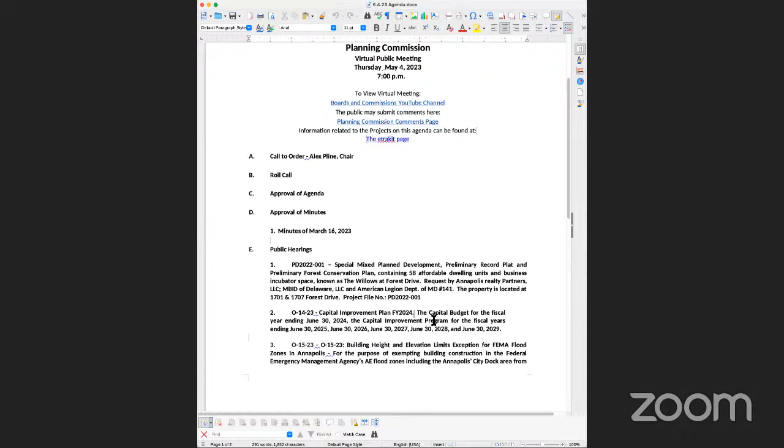The capital improvement plan, yeah. Okay, putting both those in one meeting is big, but my sense was we were going to need this meeting and the next meeting to finish both the Willows and the capital improvement plan. So that was my suggestion to move it to the June 1st meeting. Just to be cautious, perhaps we could just postpone it till the next available date. Okay, and then we can move it again if necessary.

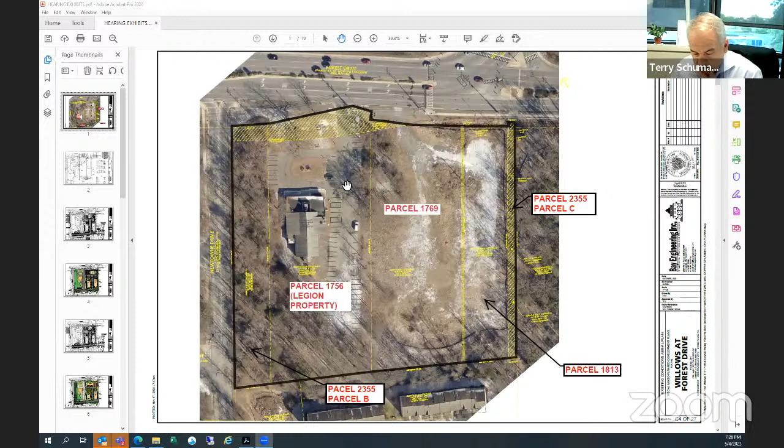All the parcels have been consolidated in the special mixed plan development proposal to promote a mix of land uses with an integrated design and a coordinated plan in accordance with the planned development. The Willows at Forest Drive will be sited on parcels 1769, 1813, and 2355 parcel C.

So that'll be the Willows project. And then the Legion will continue as its existing property. And then reserve parcel B, wooded acreage lot, is going to be added to parcel 1756 at the end of this project.

And then we're going to propose connectivity, landscaping, buffering for the Legion property as part of this project. As I indicated before, parcel B is 0.73 acres. It's to be transferred to the American Legion, which has future plans to restore the currently unmaintained area via Garden of Heroes, which enriches the healing experience of wounded veterans, their families, and caregivers through therapeutic gardens and enhanced green space. Gunny just indicated that before.

The entire property outlined in black here, the heavy black line, is comprised of 5.6 acres. It's split zoned R2, single family residence district, and R3, general residence district.

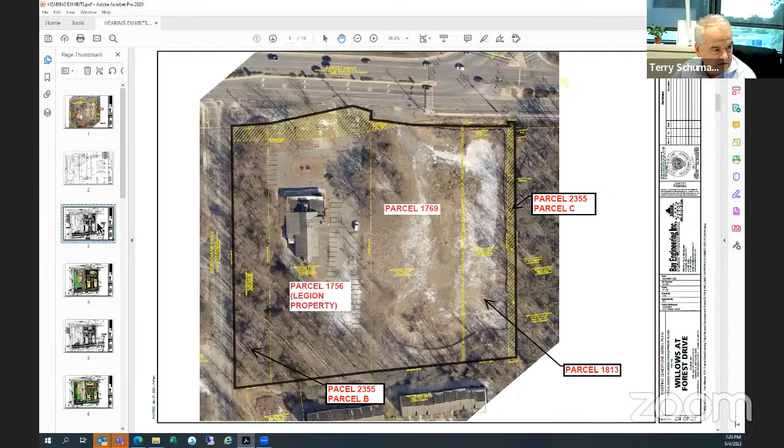I'm going to move on to this plan. So this is an existing site plan, but I just wanted to show, this parcel, which contains this heavy rectangular line, is the R2 zone, and all the other parcels are zoned R3. So it's split zoned R2 and R3.

Special mixed plan developments are allowed as a permitted use subject to standards in each of the applicable zoning districts, pursuant to Annapolis City Code 21.48.010. Also, just wanted to point out this site is not located within the Chesapeake Bay critical area.

And I thought this is a good slide just to show you. So this is the forest stand. Tom talked about it a little bit, but the heavy areas, that's stand A. This is the forested area, stand A, 1.08 acres.

And then stand B was the other stand that Tom was talking about, the other forested area. Everything else on the site is not considered forest.

These circles, the circles with no shading, are all significant trees. Those are trees identified as 24 inches and less than 30 inches. And the heavy shaded circles, those are the specimen trees, which we consider greater than 30 inches.

And just for point of context, what Tom was indicating before, this was ST4, and we'll see it as we move through. This is ST3. So these were the two trees that we were asking for a variance for removal. And stand B was the portion that we were asking for removal on the forest.

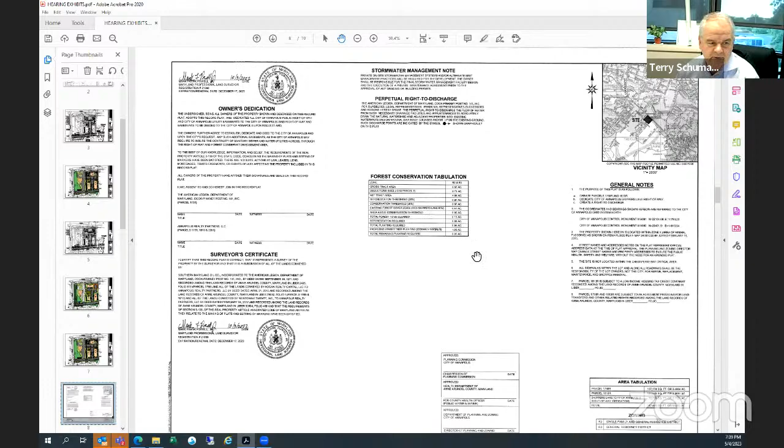And then on the second page, going back to that parcel B wooded lot, we're going to show a forest easement on that lot. This forested area was part of the original Riders Glen subdivision, and that never created the easement. So we will create the easement with this plat.

Again, this is a preliminary plat for tonight, and then we'll go back and make the changes, submit them back through planning and zoning, and it'll ultimately come to you as a final plat for approval. As far as Title 21 goes, the use, bulk, open space, and density standards have all been met for this project.

The Planning Commission can adjust the applicable bulk standards, including a 20% height increase for low-income housing pursuant to Section 42 of the Federal Internal Revenue Tax Code, meeting the criteria of the Federal Low-Income Housing Tax Credit Program. The Willows at Forest Drive complies with these federal codes and programs, and thus we are requesting a 20% height increase from 35 feet to 42 feet. We believe these heights are compatible with the 42-foot tall residential structures located on adjacent properties around this property.

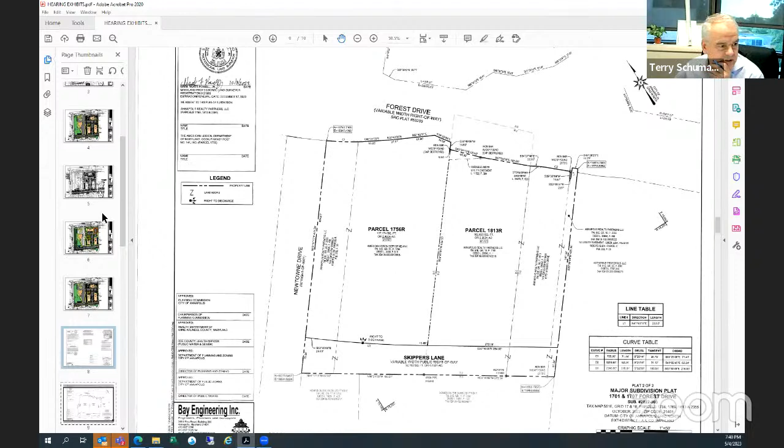As far as parking goes, as indicated before, when we came back in from the work session, we did reduce the parking down, so we submitted an alternative parking request. Multifamily dwellings require a parking ratio of 1.5 parking spaces per unit for a total of 87 spaces to serve 58 dwelling units.

We've provided an alternative parking needs study supporting that request for a reduced parking area. As noted in our report, affordable housing historically has not required full compliance with parking code requirements. The applicant has constructed and managed numerous affordable housing projects throughout the state of Maryland. Based upon their experience and a parking needs study of their facilities, a parking ratio of 1.1 parking spaces per unit is being proposed for a total unit parking of 61 spaces.

So at a 1.1 parking rate for the 58 units, we provide 61 spaces on site. We also have that business incubator in the building, which requires 6 parking spaces, and that's being met as well on site. So we have a total of 67 parking spaces on site. For the Legion property, they require 47 spaces by city code, and they're providing 67. So the parking arrangement between the two will allow for overflow parking if needed.

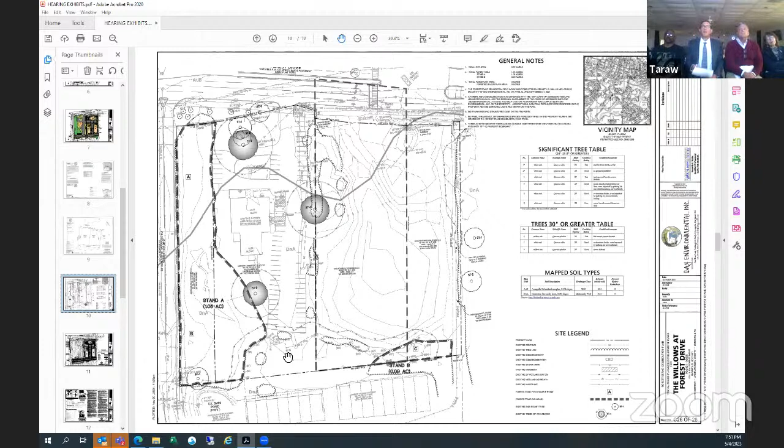I'm sorry, can I interrupt for a sec? Sure. So just a couple of things on the forest conservation plan - specifically with respect to the variance to disturb that stand B that we mentioned about earlier, can you talk a little bit about what if that weren't approved, what hardship would be incurred?

The hardship would be - it wouldn't work. That whole road was aligned with the adjacent property out to Spa Road, so the whole alignment would have to change. It would affect - the road would have to go north, around it and bisect the site. It would impact every property along the way. And do you think this development is even possible if you were to have to reroute Skipper's Lane? I don't think it would be. Okay.

Now, with respect specifically to the factors in the variance request that are in tab 21 of the proposal, most of them deal with what I inferred was the variance to remove ST3 and 4. There are six factors that have to be addressed in that section of the code for the variance, section 171 of the code, but most of them deal with - I think the variance that the staff said was not required. Do you want to walk through those six factors with respect to disturbing stand B versus removing those other two trees?

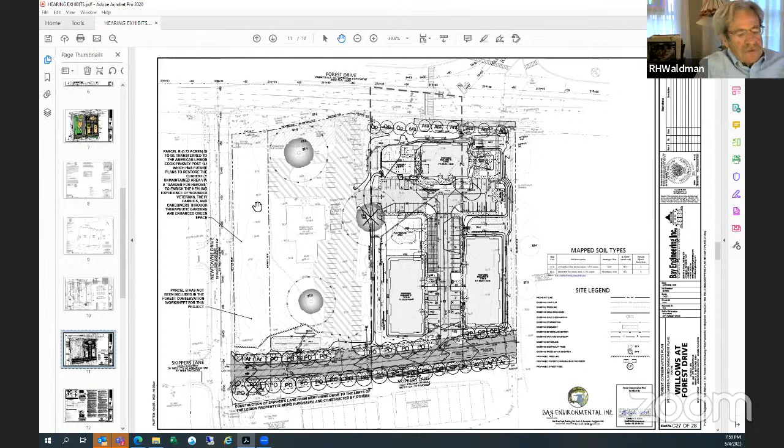Somewhere on one of these maps, you indicate that there are some significant trees right off the property to the east, actually in the village of Providence Point. Yes. Yes, ST1 and ST2, yes. Okay.

They're identified up top here in this table. Okay, I can't read that - so can you tell us how big 1 and 2 are? ST1 is a 25-inch white oak, in fair condition. ST2 is a white oak, 25-inch, in good condition, doesn't appear to have any apparent problems. Okay, a tree with a 25-inch diameter trunk - is that what we're talking about?

Correct. What's the... Mr. Wallace? I'm sorry, Mr. Walls? Wallace, excuse me, thank you. What's the drip line diameter on a 25-inch diameter tree? How far out does the drip line extend? That depends on the tree, how large the canopy is. This is a forest grown tree, so the canopy is going to be smaller than you'd have in an open grown tree. So the exact drip line, it's hard to say - the difference between the drip line and the extent to which the roots extend.

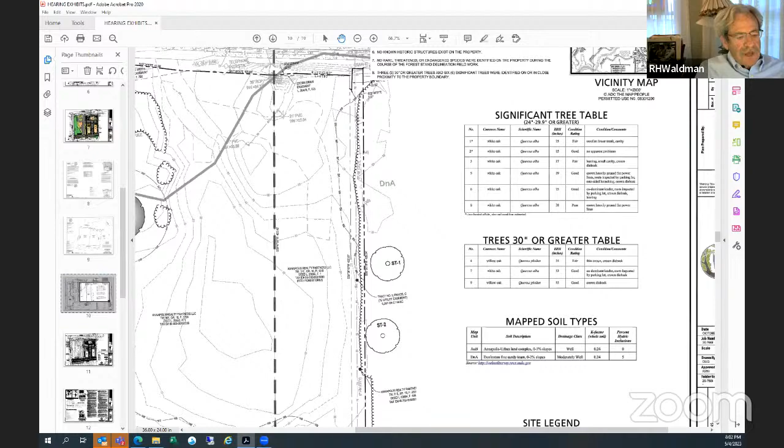Are you able to give us a figure of how close the foundation or limit of disturbance is going to be from building B, sometimes called building 2? You understand there's a big building that goes as close up to the buffer line as it can, and it is directly in front of those two trees. So if we could get some idea of how close that building comes to that tree.

So the closest one is ST2, right? That's at the bottom, yes. From the center to the building is 50 feet. What's the limit of disturbance? There's a force main right here from the city already. Our limit of disturbance is about 20 feet from the building. So that would leave 30 feet from the center to our limit of disturbance, approximately right here where the plantings are. We're about 30 feet.

Mr. Wallace, what if anything should be done to ensure there's not significant damage to the root structure of both of these trees? What kind of construction techniques would be suggested? It's important to note, I'm not sure when that force main went in, but those two trees, 25 inches, have been there a while. So my guess is when they put that force main in, the last 20, 30, 40 years, they severed most of those extending roots toward the property. That doesn't mean some haven't grown back, but my guess is if they open trenched that, they cut all those roots on the west side of both trees.

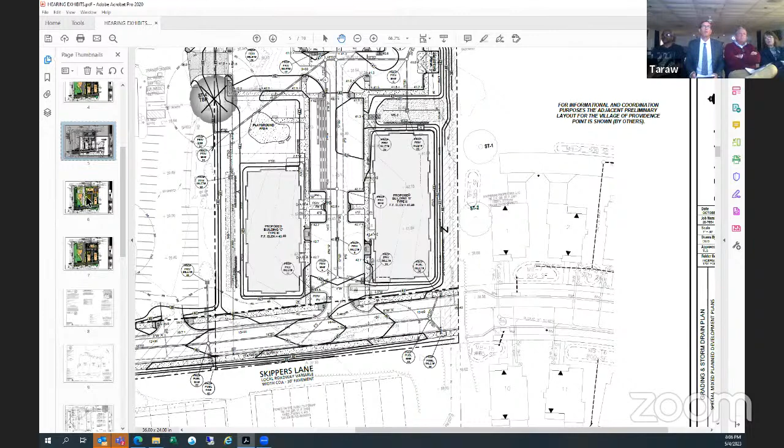Mr. Seaman, can you comment on how much of the overall property is dedicated to the new Skipper's Lane? That's sort of a carve out of the usable, developable part of the property. Of our 3/4 of an acre, 0.75 acres. I think you asked me how much of the acreage is being dedicated for Skipper's Lane? Correct. Yeah, 0.75 acres.

Total, that's from Newtown Drive to the limit of Skipper's Lane. Well, they're gaining all sorts of advantages from being on Skipper's Lane and having access on Skipper's Lane. Yeah, I'm just giving you the square footage, right? Or the acreage.

But part of this layout and everything we've evolved to is partly because we've given up 0.75 acres and everything's pushed this way. We're being pushed this way from Forest Drive. So the Skipper's Lane and the Forest Drive constraints have all come together to explain why we've come up with this development. It helped to develop the site plan.

Mr. Seaman, with respect to this staff report, there were two conditions in there. You mentioned some of the conditions already, but there were two conditions on which the development team felt we could use some relief to make sure this property could go through. One was a request for an additional 20-foot buffer from Forest Drive. Can you just comment on that?

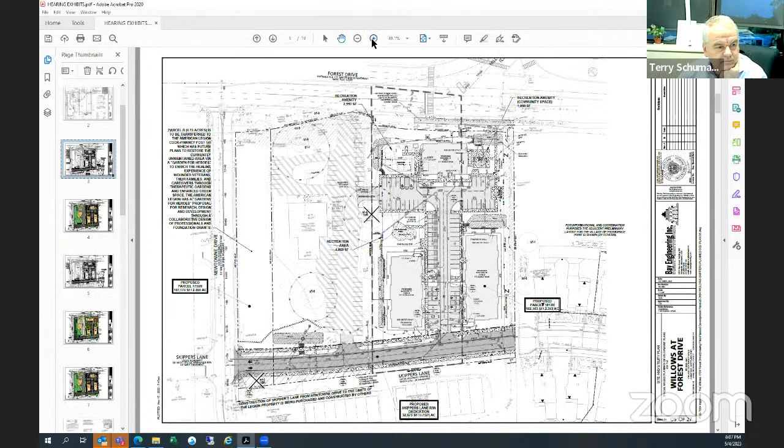Yeah, let me go to the site plan. I think the staff report indicated they would like to increase it — you'll see it in the conditions. Currently, the way we have it proposed, we have a 20-foot, 20.5 foot setback to the property. And if you take the building to the curb line of Forest Drive, it's approximately 50 feet. The condition was they would like us to increase the 20-foot to 40-foot, which would result in a 70-foot buffer from the curb line to the building.

And the hesitation on our part to do that is we've developed this plan with amenity space and gathering areas in the front, and setbacks off of this interior more for community benefit — larger patio areas, gathering areas, garden plots, and playground areas. If we have to shrink it, we'll just be taking away areas meant for the benefit of the community. So we met the 20-foot landscape buffer, and we were hoping we could propose the plan that we showed today.

Can I ask a question about that? With respect to building A, what's different now is that it's smaller, and the incubator stuff is there. So what's all on the lower floors of that building? I'm thinking about the buffer with respect to noise from Forest Drive — I'm assuming that's kind of what staff was getting at, a larger buffer essentially meaning less noise. Do you mind if Judy speaks next about the architecture? She could probably answer that better than I can.

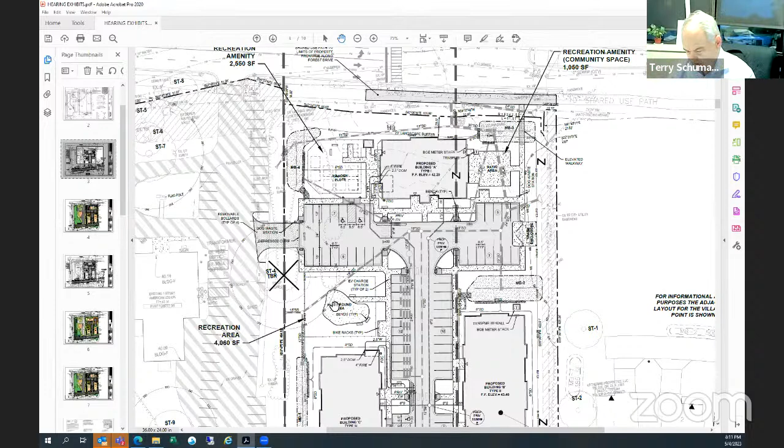Mr. Schuman, there's also a condition related to traffic control out on Forest Drive. Can you just comment on that? Yeah, I think it's condition 5. It recommends that the applicant shall coordinate with Anne Arundel County Department of Public Works for lane configuration and signal phasing modifications at the Forest Drive, South Cherry Grove Road intersection. These improvements shall be approved and bonded prior to the issuance of grading or building permits.

Our understanding is that the traffic APF study didn't require any mitigation — it was just a recommendation in the traffic study. But my understanding is that these improvements are being done by Providence Point. So I just think the condition should be clarified, that these improvements are to be done by Providence Point.

What's the buffer between the two lower buildings and the sidewalk? What kind of distance are you talking about there? Those are 15 feet to the sidewalk.

And 14 feet. We looked at that a long time ago too, trying to provide some sort of streetscape there. I think that was something planning and zoning was pushing for as well. So we think the 14 and 15 foot is adequate to provide some landscaping and buffering in this area, so the buildings aren't right up against the sidewalk.

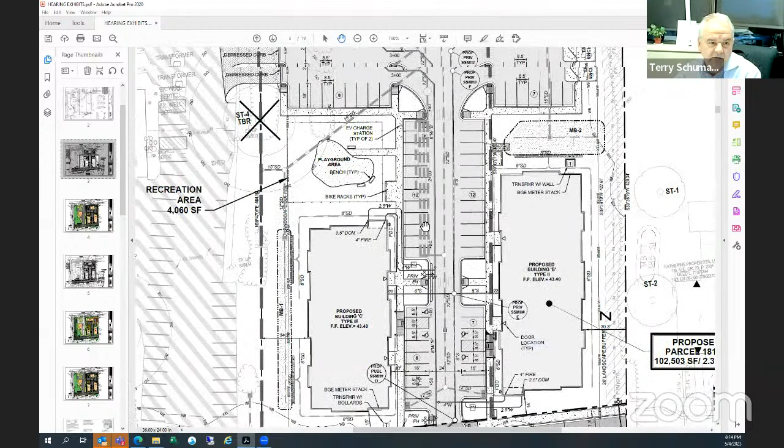You'd lose parking in here, but you would lose. I guess you're right, Mr. Waldman, you could just reduce this and take the whole site and move it down. Well, and lose one at the top. I'm just trying to think it through about what you could do. You're talking feet, less than 10 feet.

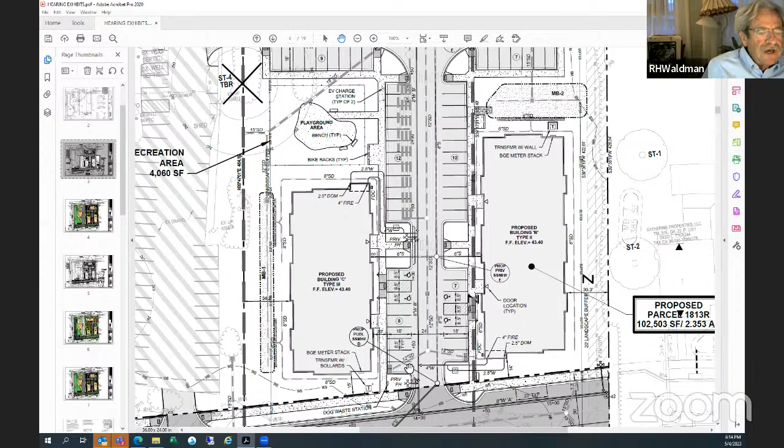So every foot counts, so to speak. Absolutely. So if the whole thing were moved 8.5 feet down, then you would only lose 8.5 feet at the top. Right, yes, okay. I'm just trying to think it through there.

And I think, adding space back here, if you go back to the police, the safety and landscaping and things like that, these are just areas that aren't really useful. But there may be other, once we hear from Mr. Smith, we may hear what his reasons are, and there may be modifications to the plan by way of some fencing or whatever. I'm not quite sure yet what his reasons are, but he'll have a chance to explain those. There may be some compromising available. Agreed, definitely agreed.

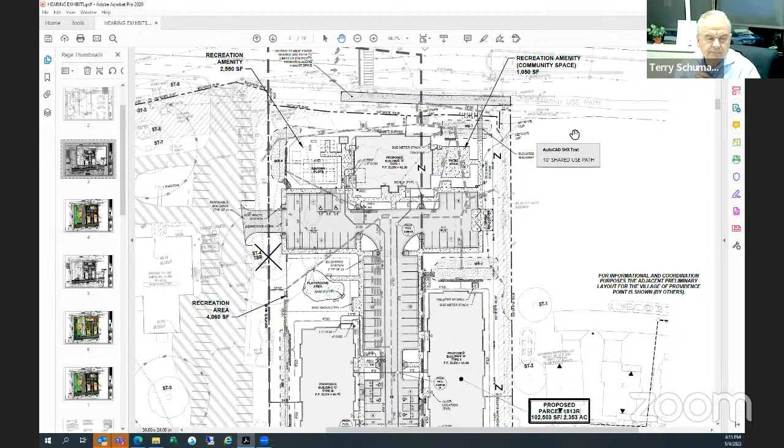Okay, unless there's further questions for Mr. Schuman, I'll have Judy Miller talk about the architecture here.

Hello, remember me from last time, Judy Miller with Architecture by Design. Terry, do you have slides of the architecture? Yes, I do. Give me one second, I'll put that up.

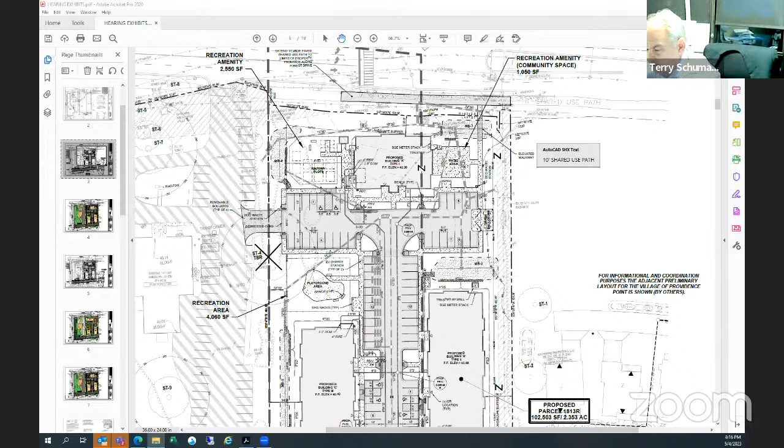Can you put it up on the left so I can see which sheets are going to come up? There we go, thank you. So this is the cover sheet of the latest submission, where it indicates what the architecture looks like. It's been adjusted based on feedback from your group from previous meetings. As you can see, it's 3 stories, not anything that is obtrusive. It has nice roofs, nice porches, some cottage style windows, gables, and a mix of brick and siding and shingle siding.

I'm trying to think, do you have the renderings in this, the other renderings we did, Terry? Yes. You talking about the sketches you did? No, not the sketches, I think we had some other colored renderings. Give me a second.

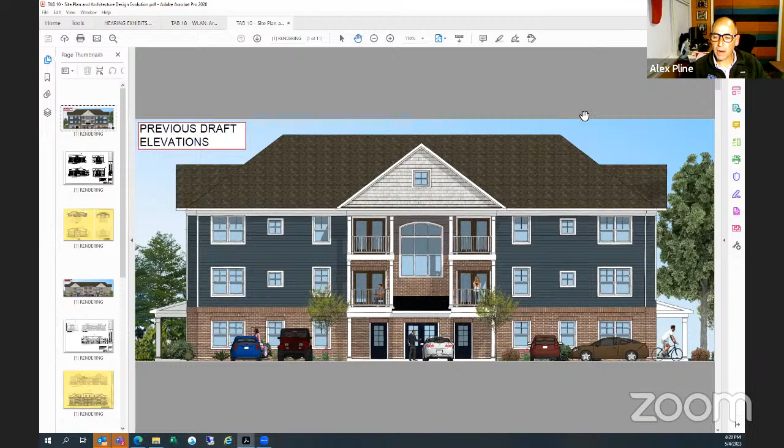How about for building A? So it's just thinking more about the setback. Okay, Terry, can you go back? Yes, thank you for that one. So go to building A, floor plan up there.

Okay, so first floor plan, there are 2 three-bedrooms on the first floor, and the rest is all the incubator space. And your residences face forest and your incubator faces inward? Yes, it does.

Why wouldn't you want to put your residences towards the quieter side? Well, we like to keep eyes on the street with the offices. That's where the leasing office is, and they can kind of keep an eye on the community.

And what's interesting about this building, what we did to get a continuous space across the first floor, those 2 first floor units that face the backside of the building have their own private entrances. They have a nice little porch that continues across there that brings them from the parking back there, and it's fully covered. Terry, you are wonderful, I'm going to have you as my Vanna every time.

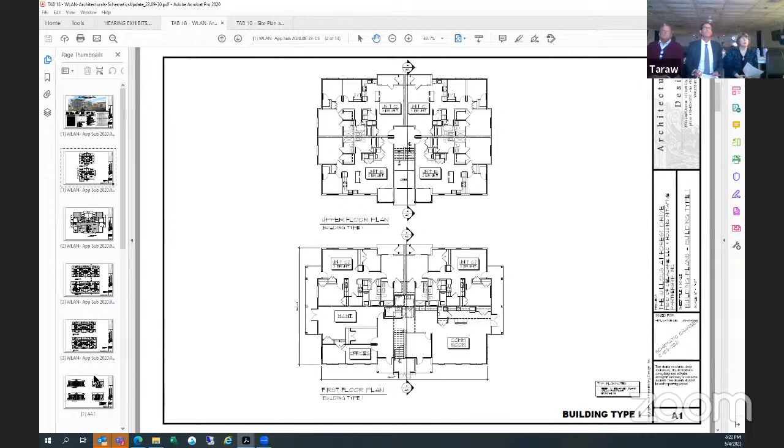And can we see the layout of one of the other 2 buildings, not building A? Go down to, yep, that one. Up, yep, that one. Okay, so this is type 3, and this is an old one before we coordinated between the site plan and the architecture, which was A, B, and C, and 1, 2, and 3.

So this is also known as building C, and you can see that it's basically 2 pods of gardens that are linked together at the center. There are 4 units per stairwell and 3 stories. So for a total of 2, 4, 3, let me see, that's 12, 24 units, correct? Yes, in that building. And this is all 1s and 2s.

A question about the ADU units. Are they in a specific building or just throughout? Some of them might be in different buildings, all affordable. Did I say accessible? ADA? I meant the ADA, accessible. Sorry, oh, I'm sorry, I thought you said ADUs and I don't know that answer.

So if you look at this plan, matter of fact, this one has a UFAS unit right in the front. Yep, right there, you go. Okay, I see it now. Thank you. So that is your UFAS unit, that's your higher level of accessibility. All of the ground level units meet fair housing, which has a higher level of accessibility than your average housing.

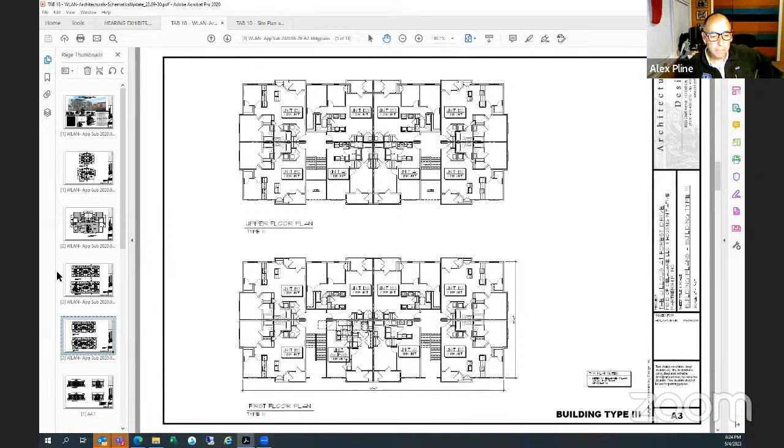Anything else? I don't think so. Is there any additional comment? No. Does the commission have any other questions on the architecture? Anybody? Not for me. Well, that concludes our presentation.

I believe Mr. Smith had some comments on the conditions. Mr. Chairman, may I continue? Yeah, go ahead. Certainly, Terry, thanks for leaving the site plan up.

So the staff has recommended, beginning on page 16, there are 35 conditions, most of which the commission has seen before. There are a number of standard, boilerplate conditions, but there are a few that are specific to just the Willows project. And since we've been talking about building A quite a bit here, we've actually talked about the location and position of building A for almost 2 years since the onset of this project, and the location consistency with other buildings on Forest Drive and their setbacks.

If you look at the Village Greens of Annapolis, it has 2 commercial, 1-story structures set approximately 65 and 70 feet back from Forest Drive curb line. The commercial building across the street is a 2-story building set approximately 70 feet back from the curb line. So in trying to be consistent with structure locations on Forest Drive, but also because this is a residential structure of 3 stories, to give residents relief from the noise of Forest Drive, we want to push this building further back. Staff believes this can be achieved not by removing parking spaces, but by relocating parking spaces.

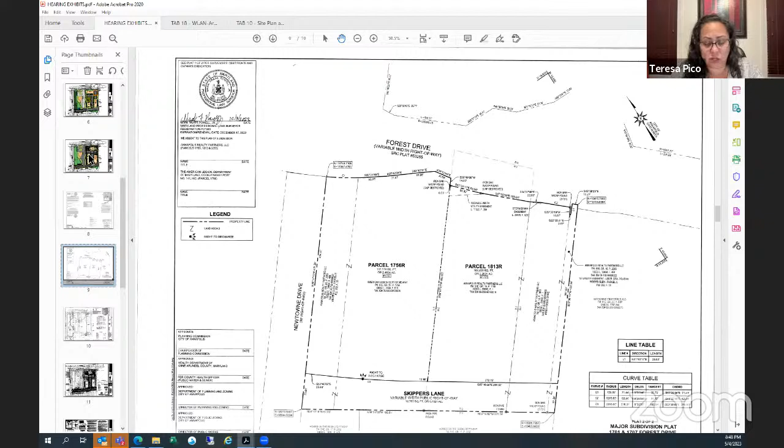Understood, thank you. And then as far as emergency access, I noted somewhere that emergency access was expected to be utilizing that space through the American Legion property. Did I read that wrong? Is emergency access available on Skipper's Lane as well, or is it only through the American Legion pathway through the bollards?

No, emergency access for American Legion is going to be off of Skipper's Lane, off of Forest Drive, and between the two sites. I mean, you remove the bollards, so they'll have full emergency access.

Didn't I see something in the application package that looked like turning radii for the T of the parking lot? I assume that was for a fire truck entering off Skipper's Lane. Is that correct, did I read that right?

That's correct. We designed this T so a fire truck could come in, back up, and then leave. But if the fire truck needed to pull the bollards and get out this way, he'd be able to do that. Having the bollards there, in an emergency without time to go out and unlock them, you still have access to the site with the fire truck.

Through Skipper's Lane. If the bollards stay in place, we still have adequate access, and the fire department scrutinized and looked at that through their review. Yes. So their acceptance of this design was not predicated on having to remove the bollards. That's correct, that's why we did that turning template that showed they could come in, back up, and leave.

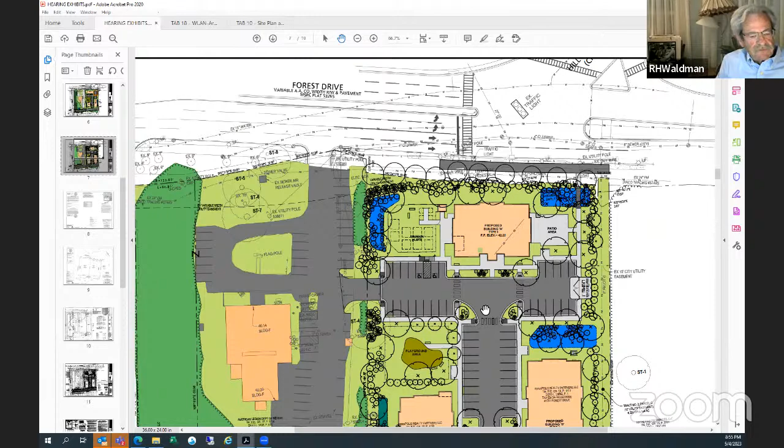Put it on the other side, it flows to the community building. So put the patio area on the other side and have the community space on that side also, and move the whole building to the right, and you end up with much more integrated space to the left. Anyway, you've got 2 weeks to think about it.

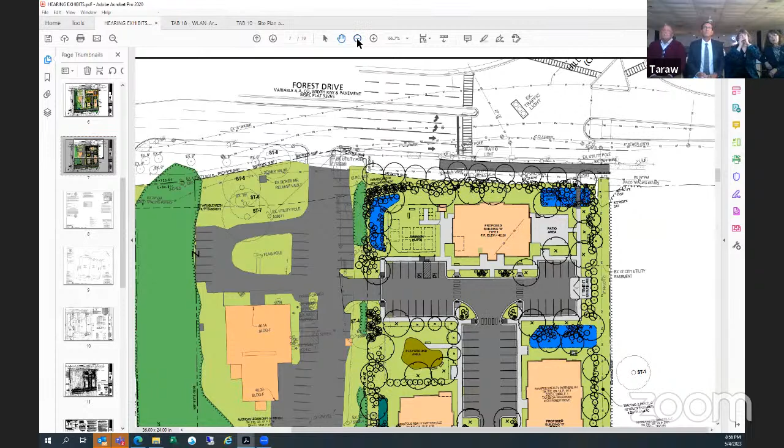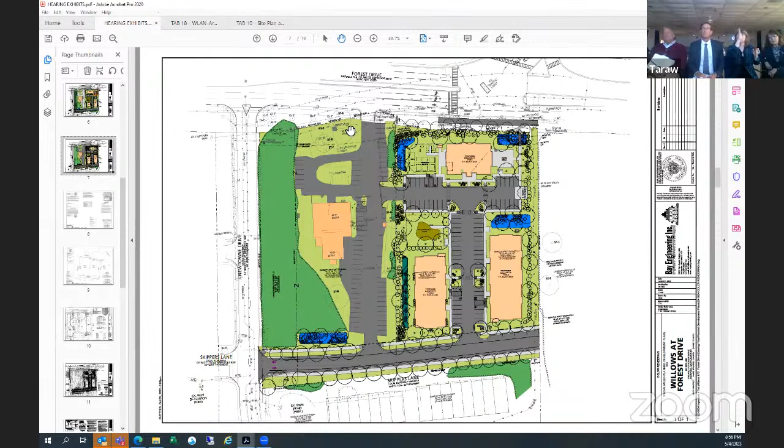Can I interject one thing? Because at the work session, we did talk very much about, can you zoom out a little bit, Terry, wanting Skipper's Lane and the architecture to address that so it felt more welcoming, not pushed so far back away from Skipper's Lane. So we pushed that down. It was very important to align the axis of the drive coming in between those buildings with the axis of the building up above, so you have a focal point, which happens to be the entry of your property. That is very important to be in focus with that drive.

Yeah, but you're looking down a whole lane of parked cars. That's what, 150? But it's not. I disagree with you. I'm not going to debate with you.

I thought you wanted to discuss it. Sorry. I mean, I think that you made a good point. I think what we would refer to that as the terminating vista. That's maybe a little bit hyperbole in this case, but I think that's a good point.

One last question: the width of the sidewalks on the south and the width of the lanes on Skipper's Lane, are they congruent with the expected width from the adjacent development on the east? Yes, you have two 10-foot drive aisles, one in each direction, then 2 5-foot bike lanes, and then 6-foot sidewalks.

Separated by how much green space between the bike lane and the sidewalk? I think it's like 6 feet. That's substantial, that's a nicety of this drawing right there. It is. But I'd like to point out, that's on the north side. On the south side, we were putting the sidewalk up against, there's quite a drop off in grade here. Yeah, you're reading my mind, Terry. Keep going. So we pushed the sidewalk in this area up against the curb on this side, but we have the green in between the sidewalk over here. Otherwise, we'd be looking at a retaining wall.

That's the last thing I want, Terry. Appreciate it, thank you very much. It's coming.

Mr. Schuman, you're quite a director tonight. Yeah, thank you, you've been great. Thank you, and please zoom in on it - I've got a small screen here.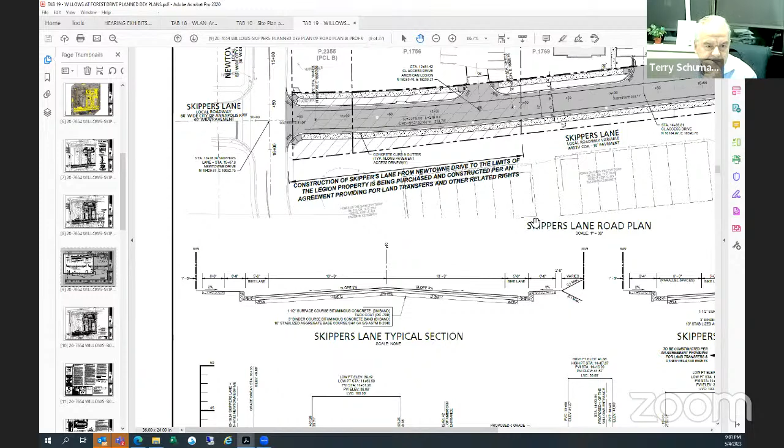Would you be changing the alignment of Skipper's Lane terribly if you flipped what's on the north side to the south side? In other words, you put the green median between a sidewalk and a street on the south side, and had a sidewalk tight to the curb on the north side.

What would that do to the alignment of Skipper's Lane? It would really affect the neighbor, Providence Point. I don't think that works - if you look at the right-hand side of this drawing, it would disjoint it. And I think there are some things in Providence Point up in that corner we'd have to go back and look at.

All right, it's a thought raised by Mr. Sale. Again, people should be driving 20 to 25 miles an hour, so it's not like Forest Drive. That's what you think, we hope.

Well, that's a discussion for another day, but traffic calming is always welcome eventually if you need it. But that's not germane to this discussion right now anyway.

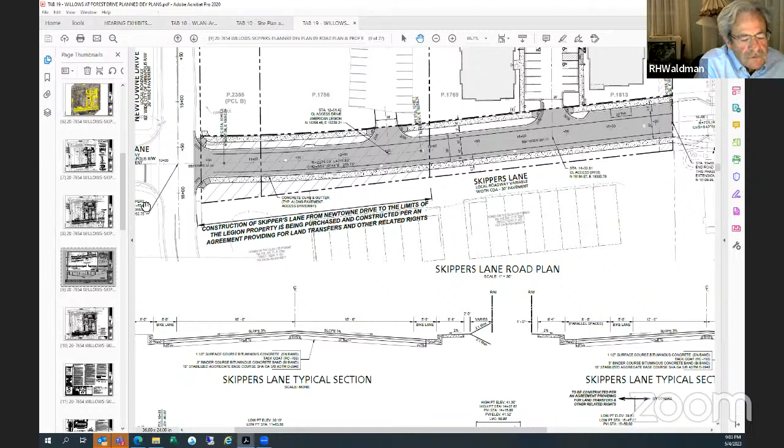I have one final question, then I'll let everybody go. This is based on what Ms. Pico was asking, Mr. Smith - when the Department of Parks calculates the distance from a development to a recreational facility, do they calculate the actual distance a person needs to travel, going to a street, making a left, walking 2 blocks, making a right, and so on? Or do they calculate it simply as a straight line, as the crow flies?

Disregarding what people actually have to encounter in order to get to the park. Understood, Commissioner Waldman. I believe it is delineated as a radius drawn around the subject property, regardless of what route one has to walk, drive, or cycle to get to that amenity. It is within a half mile.

The only policy we've added is that if the recreational facility was across water, such as across the creek, we did not allow that to count, as in the case of the Eastport Shopping Center. There were recreational facilities on the other side of Back Creek within a half mile, and Recreation, Parks, and Planning and Zoning said those should not count. But it is a radius around the project.

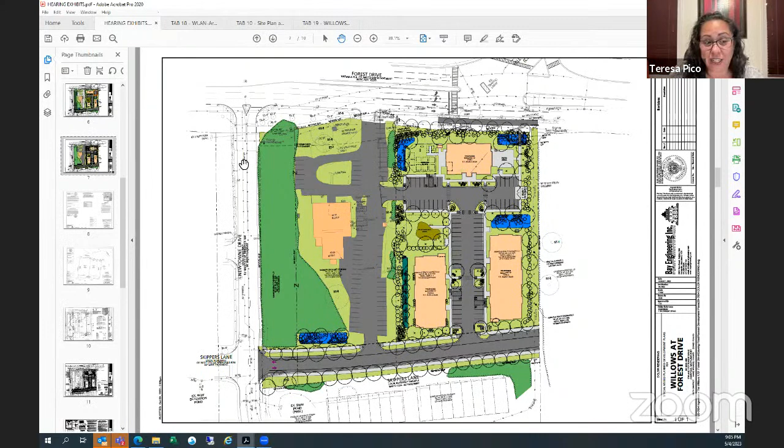Well, this is why I brought this up. I'm sorry to interrupt, but it's actually over a half mile. I know we're getting close, but it was 0.6 from the edge of the closest corner of that property, and the reason I walked it, it's 0.6. So I'm asking, is it truly a half mile from the middle of the parcel, or is it from the edge of the parcel? Where was that calculated? I would have to defer to Recreation and Parks, and I can provide a definitive answer in two weeks.

Thank you. Anybody else have questions? Hearing no other questions, at this point I will declare the public hearing open. Since we don't have anybody signed up, I think this will remain open until our next meeting. So at the beginning of our next meeting, if anybody signs up, we'll hear any testimony people might have and go from there.

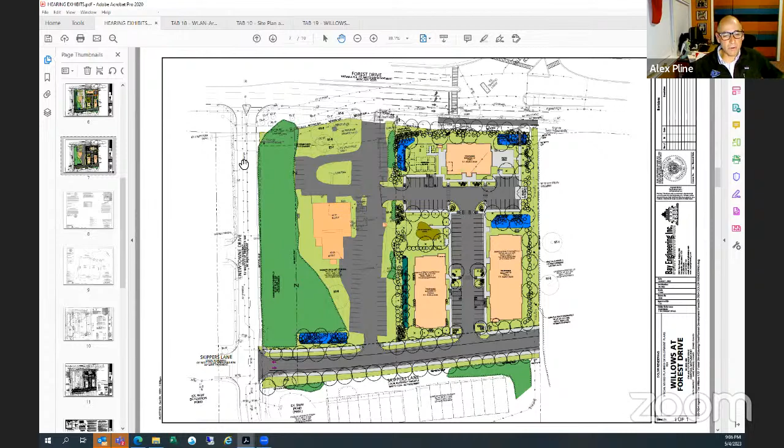Okay, so at this point I think we're ready to move on, but first, thank you all for your work and presentation here. It's good to finally get this in front of us. We look forward to having anybody from the public come talk to us next week or in two weeks if they wish to do so. So thanks again, and thanks to staff.

So at this point, let's move on to our next item, a review of the budget for the CIP. I guess Mr. Jarrell's going to lead that. Yes, thank you, and good evening, everyone. Good discussion of the Willows. I appreciate that. So yes, I'm going to present the CIP.

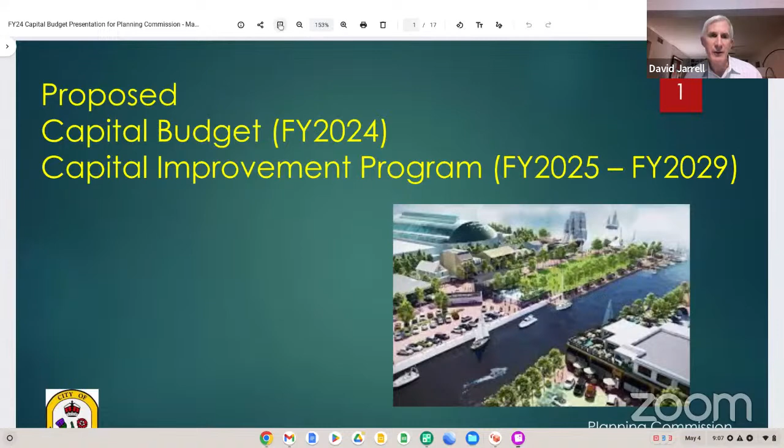Eric Lashinsky's here, and he's going to tag team with me because some of these projects are still in planning and haven't actually come over to Public Works yet. I'm going to talk initially about all of the projects that are funded, but I'm really going to focus in on the new projects as we move through this presentation. So next slide, please.

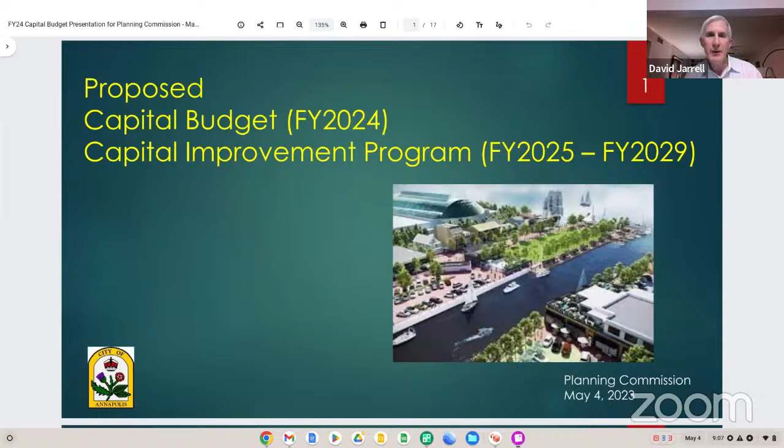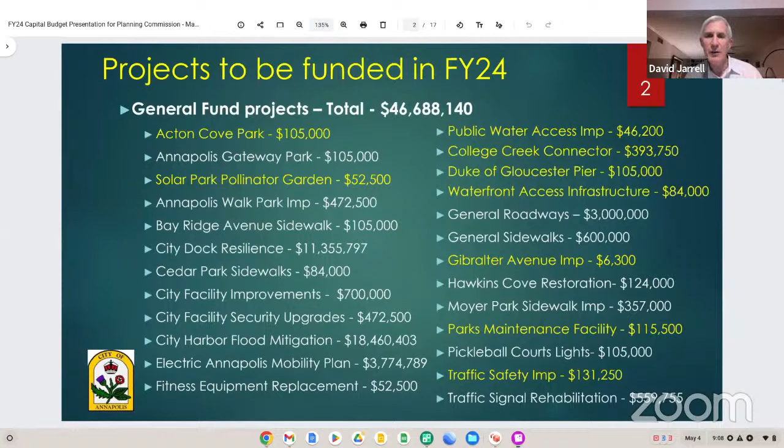So Eric, let's go ahead and move on to the second page. This is the rest of the general fund projects receiving funding in FY24, and again, just a couple of those are new projects. The rest are ones that are just moving forward. Some of these have been in the pipeline for a number of years and are gradually working their way through. Some of these were new last year and are just getting the second tranche of funding.

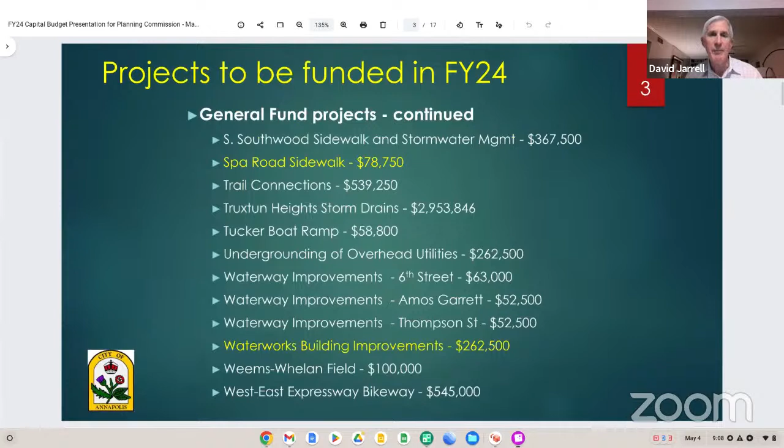So Eric, let's move forward to the new projects. So Acton, this is actually Acton's Landing or Acton's Cove Waterfront Park. This is actually a project that the residents talked to our state senator and showed her some of their concerns, and she went back and got us $100,000 of state grants to allow us to move forward with this project.

So the initial scope will be to do a feasibility study and sort of a master plan for what needs to be done. Eric, you can weigh in on that, but Eric's already started some work on that with the residents, some public meetings. You want to talk a bit about that, Eric?

Yeah, we did meet with the adjacent HOA from the condo association that was kind of credited with bringing the money in for this project, I guess. And we have a pretty good understanding what they'd like to see. Most of it's related to these kind of drainage improvements that happen when there's sometimes just a high tide and it backs up onto the site. And so we're looking at landscape improvements first, raising that walkway and putting in plantings alongside that can accommodate the stormwater, but there'll probably also be some engineering scope related to the drainage. We actually have a landscape architect already involved, so the project's going to be moving forward pretty soon.

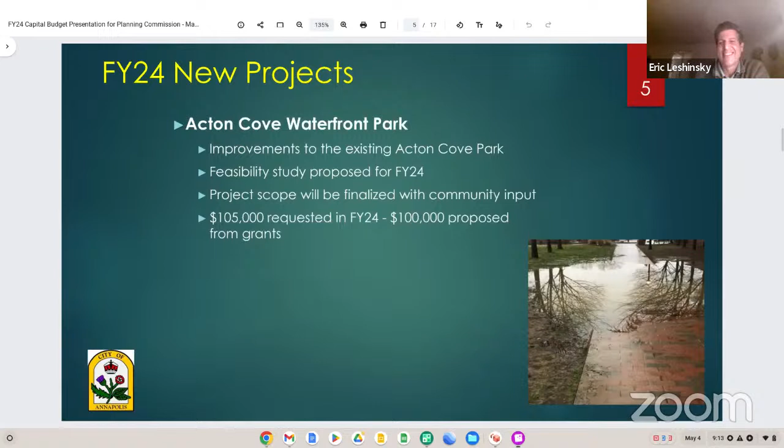Okay, so this is also obviously a new park. In case you hadn't seen an aerial view of our solar park out on the closed landfill off of Defense Highway - that is our solar park. 55,000 solar panels are out there. It generates about 16.8 megawatts of energy.

So we're going to add some pollinator friendly gardens out there. It's a great place for that. It's going to be 3 phases over the next few years. So we are using capital reserve money, which is cash funding, not bond funding - it's cash that we have available for capital projects. I think it's about $50,000 each year for 3 years, and again, that $2,500 is for the admin charge.

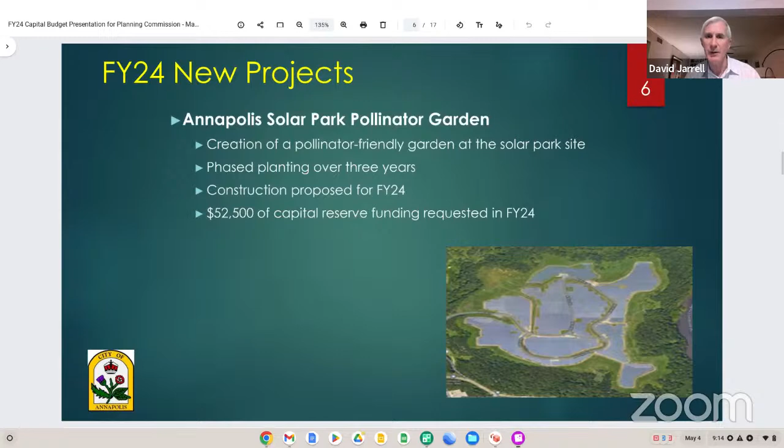We're also thinking of adding goats out there one of these days too, so we don't have to use lawnmowers as much as we do. It's about 80 acres out there, so that would be another good environmental project.

Eric, do you want to talk about this project of water access?

Yeah, sure. There's obviously been a lot of attention put towards improving and expanding public water access, protecting existing public water access. We've been working on a public water access plan for the last year, and one realization is that there are a number of sites that could be improved, but we need to do advanced planning work to get them to the point where they become standalone capital projects.

I anticipate this will be a continuing fund that identifies priority sites needing attention. We've put in two key sites for this year: one on Weems Creek, the Tolson Street Park, which was a newly dedicated park this past year and has only one existing public water access point, the Tucker Street Park. So it has the fewest public access points of any of our creeks.

The other site is Northwest Street Park, the image on the right, an existing street end park with really minimal access to the water. The view is kind of blocked by some invasives, but it's on a bluff, between the St. Anne Cemeteries at the end of Northwest Street, so it's close to Stanton Center. The idea is to study the potential to put a floating dock there, but it's a formidable site condition.

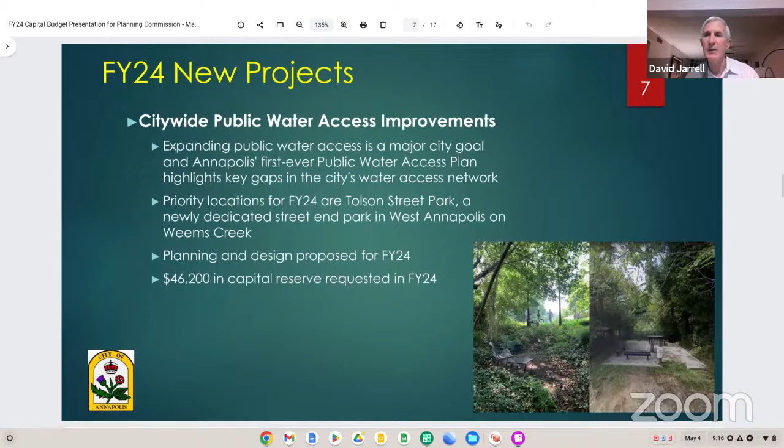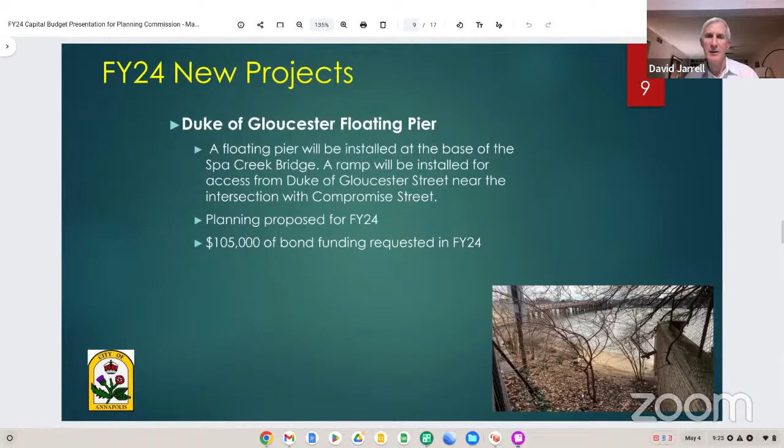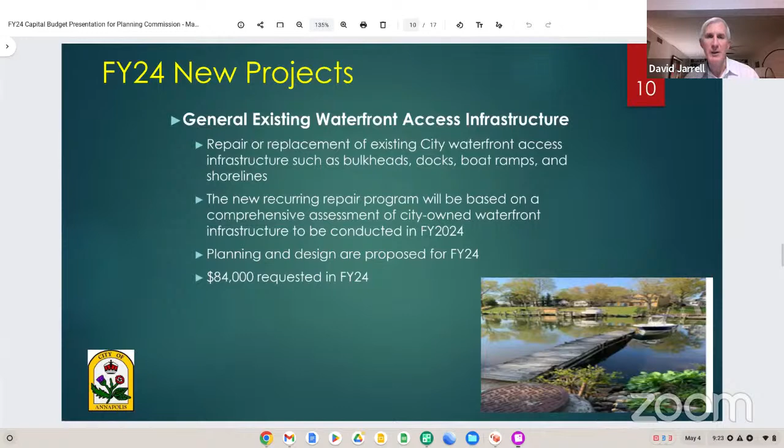This is the one I mentioned before - this is to improve the facilities we already have in place. The picture is a good example of a deteriorated dock. This is intended to be an annual project to address those things. The first year would be a survey and condition assessment of all existing facilities, developing a prioritized list of those that need to be addressed first. Then we'll continue to work through those in upcoming years.

Okay, Gibralter Avenue - off of West Street, out on the west end. It's a very commercial street if you're not familiar with it. About the first 20 or 30 feet coming off West Street is owned by the city, but the rest is private. It's in bad condition and it's gotten worse because of Monarch School parents and other buses that use it. So we're funding this project to determine who actually owns it - it was never conveyed to the city, so ownership is difficult to establish. We're going to do that legal research, and the road doesn't meet city standards, so it'll have to be widened, probably a complete reconstruction since it's in really bad shape. That will follow in future years; this just gets the ball rolling on the legal work and trying to do the transfer.

Does that have to do with unknown ownership rights in the old WB&A right of way? Is that the part that's unknown? No, I don't think so - this runs perpendicular to that. So this is its own unique situation where this road was built and was never conveyed. I think the original owners own the parcels to the center of the road, but those have been lost in the process over the years. It's just very unsure, but we'll figure it out.

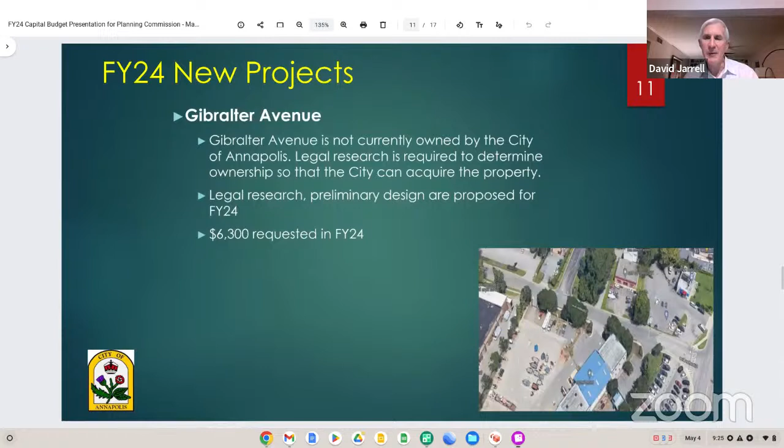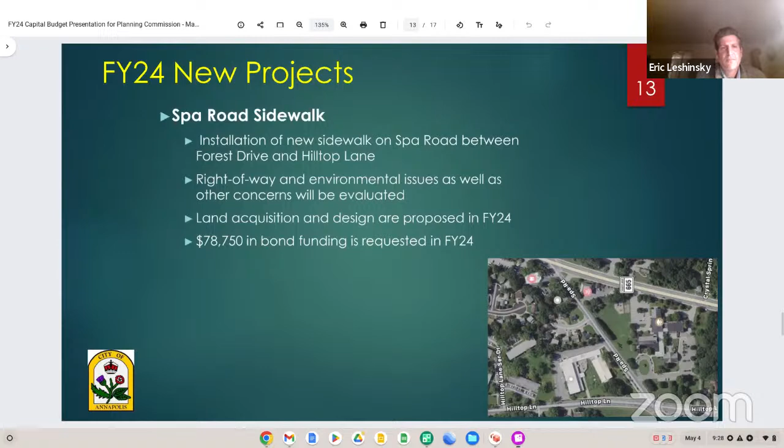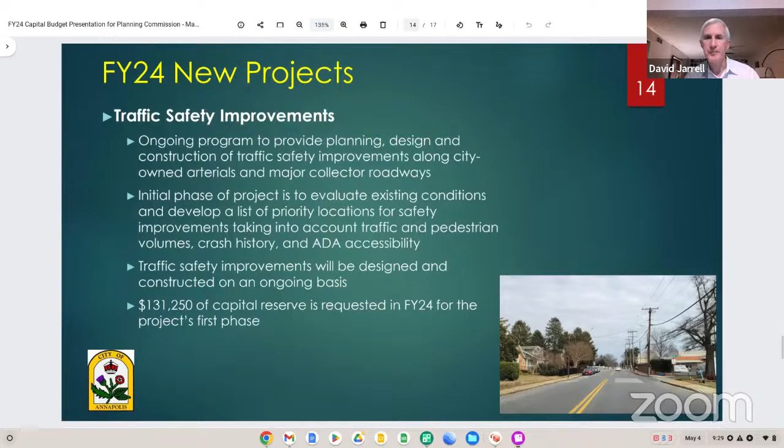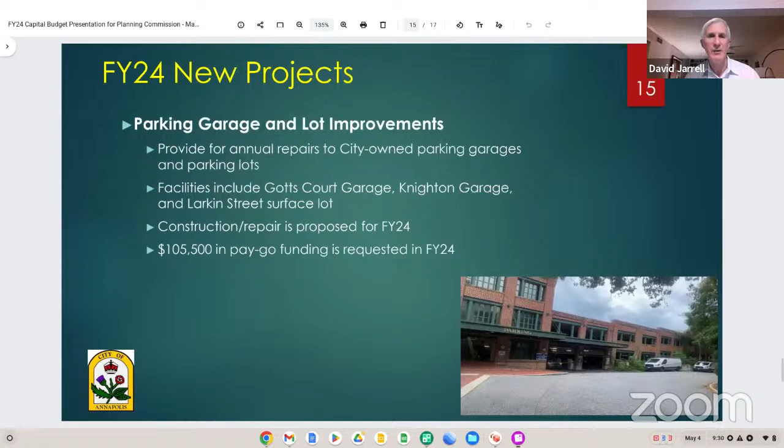This is similar - for repairs, major repairs and improvements to our parking garages and parking lots. Obviously, Hillman won't be done under this because that would be a private garage for 30 years. But all of the other garages are starting to age out a bit and need some investment to bring them back up to where they should be. This funding will allow that to be done each year. For instance, we're replacing an elevator in Gotts Court. It's those types of things that are just at the end of their useful service life and need to be redone.

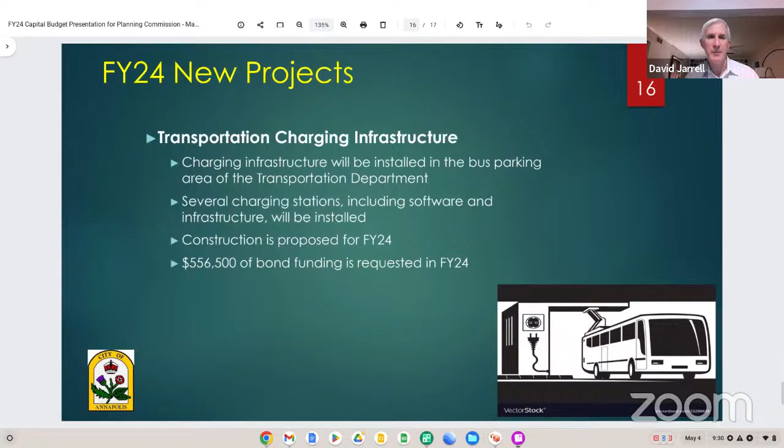We're getting 2 new electric buses in transportation, and of course they need the charging infrastructure to go with it. So this is for the Department of Transportation maintenance facility - they're going to get charging infrastructure for those 2 new buses. That's it.

Great. Anybody have any general questions for Mr. Jarrell or Mr. Leshinsky? Or any questions about other projects they didn't go over?

But go ahead. It's aggressive, it's creative, and it's been long waited for. A lot of these things have been ideas that have been bounced around forever, and now you're getting stuff done on them. Thanks. Yeah. Thank you.

Is it fair to say that one of the things I see here is these sort of ongoing projects aimed at making sure you have money in the budget to do maintenance, especially as you start to develop these newer amenities? I know we're just talking about the CIP here, but if you look at the overall city budget, would you say that some increase is there, but it's really intended to make sure you have sufficient funding for maintenance efforts, so we don't build some of this new stuff and then have no way to ever maintain it? Is that a fair statement?